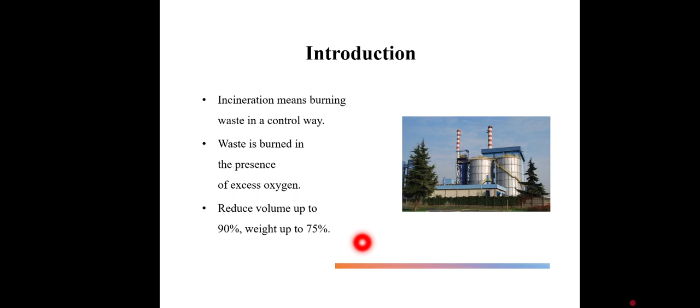The main goals of incineration are quick destruction of waste, less need for landfills, recovery of energy from burning, safe disposal of hazardous and medical waste, and control of environmental pollution.

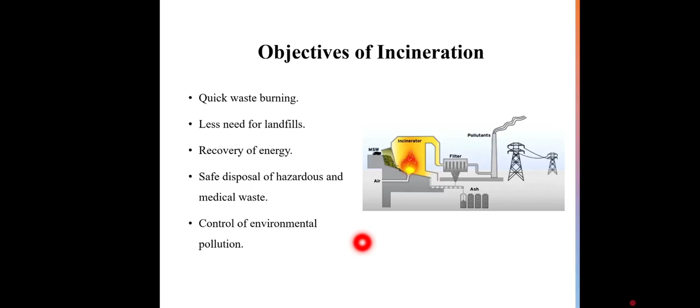For proper burning, we need three things: turbulence, good mixing of air and waste; time, enough time for completing burning; temperature, high heat for oxidation. These are called the three T's.

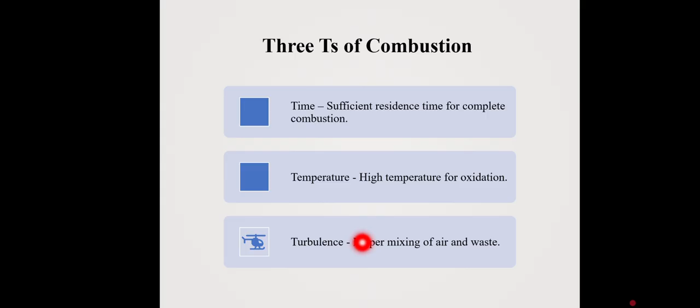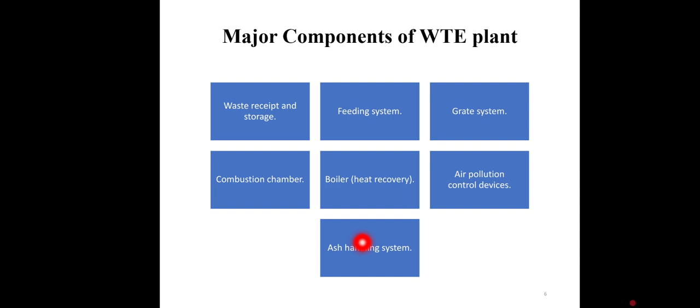A waste to energy plant has a waste storage and feeding system, grate and combustion chamber, boiler for heat recovery, air pollution control devices, and ash handling system. Together, these make the plant work smoothly.

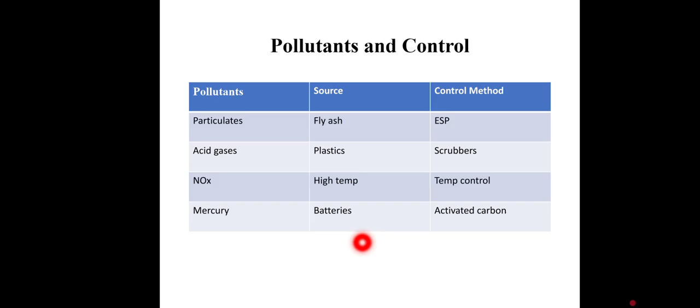Burning waste produces pollutants. For example, fly ash controlled by ESP, acid gases controlled by scrubbers, nitrogen oxide controlled by temperature, mercury controlled by activated carbon. So pollution control is very important.

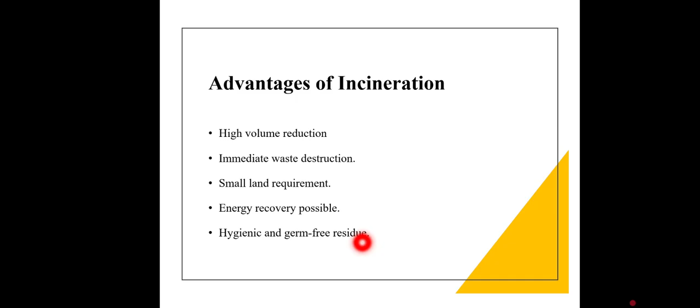Incineration has many benefits like large reduction in waste volume, immediate destruction of waste, small land requirement, energy recovery, and hygienic, germ-free residue. But there are also some drawbacks: high capital cost, skilled operation needed, risk of air pollution. Not all waste can be burned.

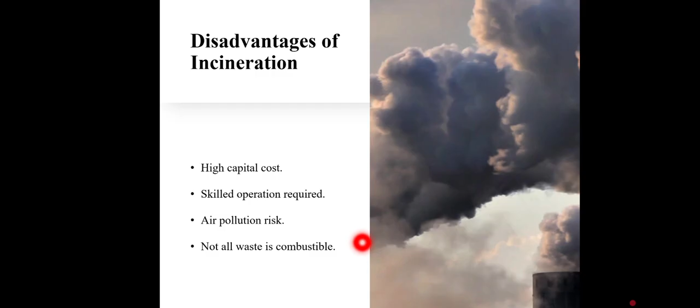In conclusion, incineration is an effective waste management method. It reduces waste volume and weight, recovers energy, and supports sustainability. But pollution control is essential for safe operation.